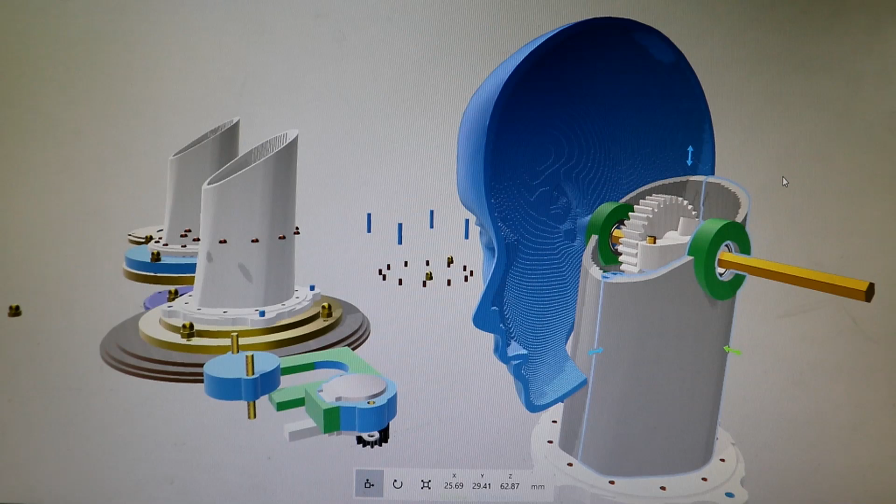Welcome back to the making of Victoria, the automaton.

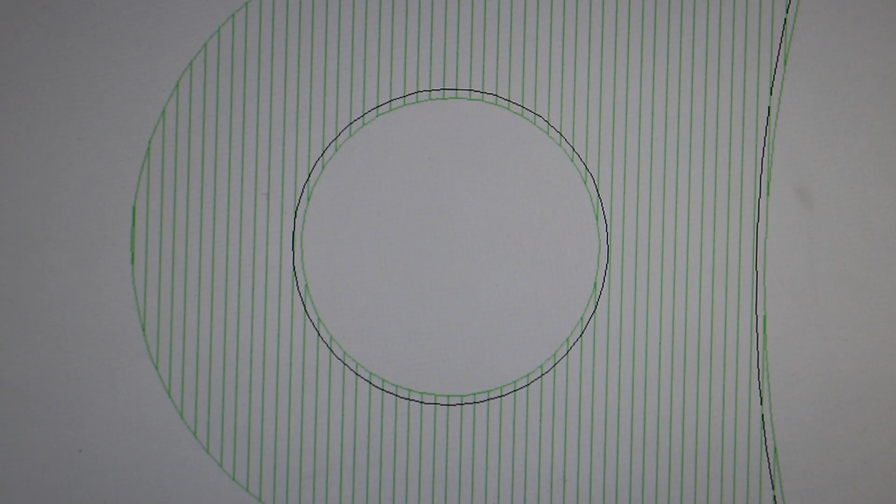I have now finished designing the neck on the computer using 3D Builder and 2D Design. Let's have a look at the other version, the 2D version of this. Here's the 2D version, as you can see, handily labelled.

You can see it's made of lots and lots of little green lines that are 0.15mm apart. Quite useful because in 2D Design you can hatch it on CAD software. So I just use the hatching fill, and the laser software doesn't see it as that, it just sees it as lots of lines. So it's going to engrave those down to about 1mm deep, and then the black lines it will cut out. Let's go and cut that out.

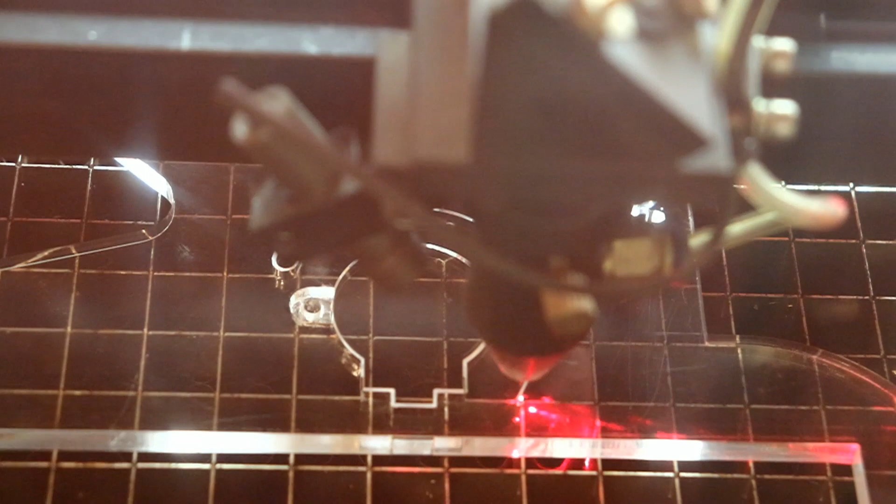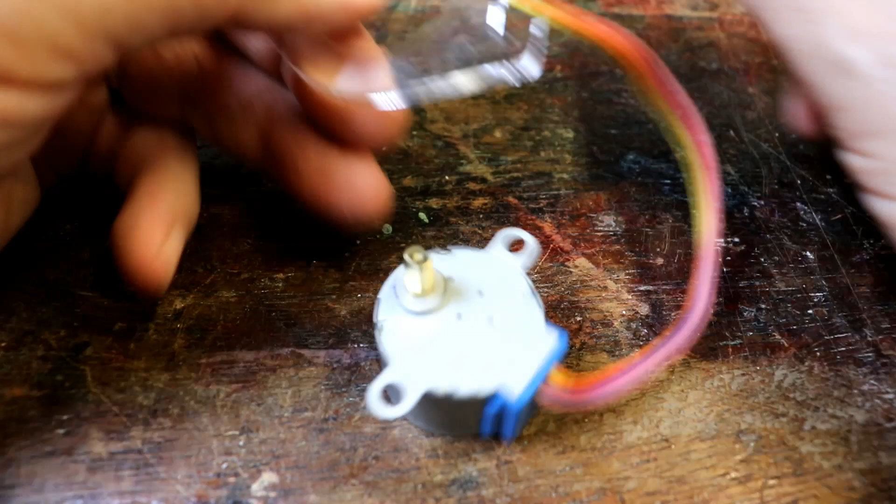So here's the finished item, and you can see there are the two rebates, they're about 1mm deep. Here's the lovely little motor, and what I'm hoping is poke the wires through there, and then this should - oh look at that, that's so satisfying. It just fits perfectly.

If you look at the shape of the drive shaft on the motor, you can see it's got a 5mm diameter with two flat sides and a 2mm base that's still round. So ideally, I don't want to have to start machining brass bits like I've done in the past to fix on linkages and things. I want to cut this shape out of the acrylic gear tight enough so it'll push on firmly, and then I can fix it on with just a couple of drops of super glue.

So here's the 3D representation of the gear I'm going to cut out. 11 teeth with this funny little bit in the centre. I imported this via a bitmap from 2D Design. Unfortunately I can't do it the other way around, from 3D Builder back into 2D Design, I can't do it.

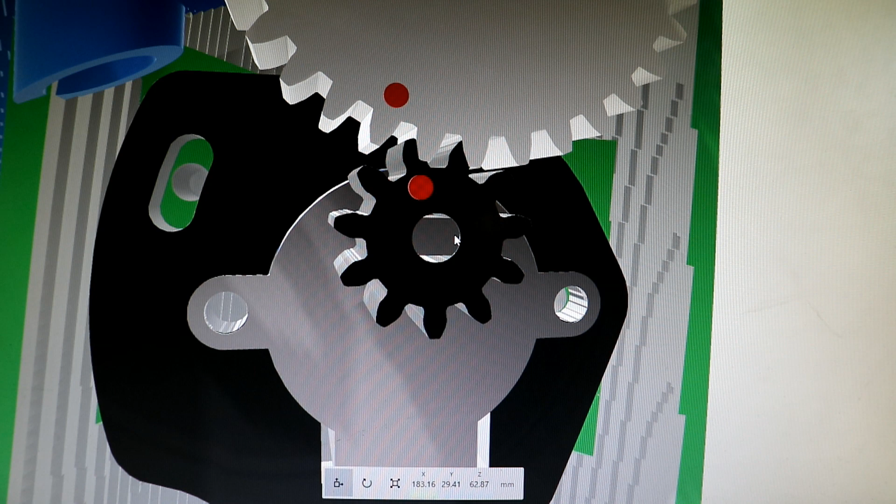Here's the gear in 2D Design, and you can see, if I zoom in, there's the same thing that we had just now with the hatching that's going to cut the circular rebate ready for the shaft to go in. So I'll export that and cut it out.

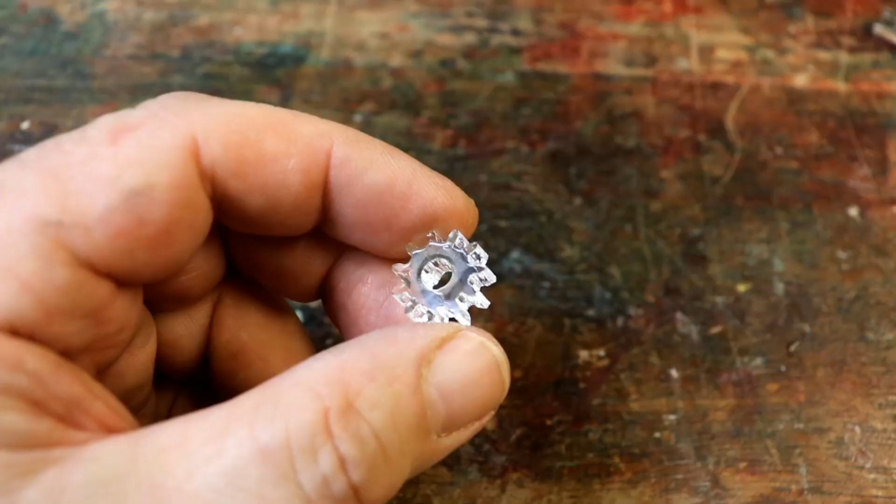So there you have it. There's the gear that's cut out, and hopefully it will just - yes, just pushes on. I can't get it too close with this lens, but you can see the circular bit's gone into it and the end bit is sticking out.

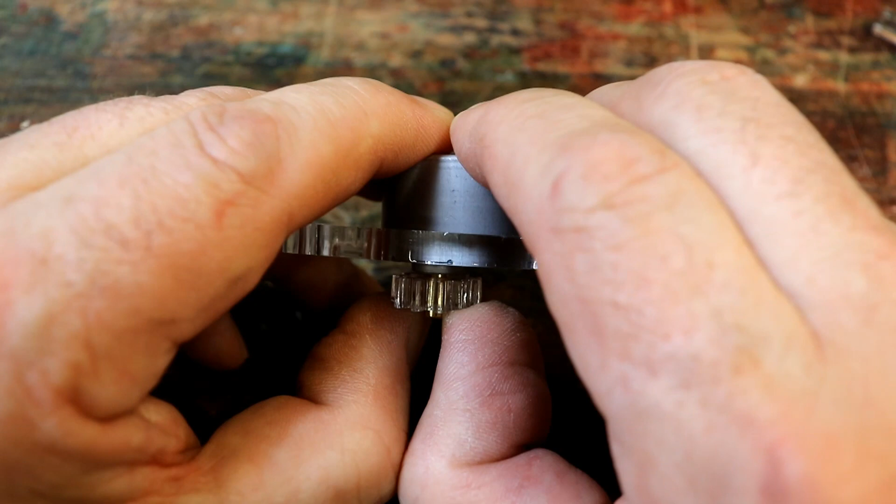Originally I was going to make the gears out of 10mm acrylic just because I want them to be really reliable and have more than double the bearing surface, basically less likely to wear out. Probably not a problem, but I thought I'd overdo it anyway.

But when I tried to cut out the gears from 10mm acrylic, it wasn't very successful because of the distortion. Some of them were worse than others. Because it gets so hot, some of the bottoms of the teeth are also bent over and things. I gave up in the end. I tried it several times, but in the end 5mm was so much better. There's no distortion at all. Well, that's a good sign, that's nice and firm. There's no distortion, the teeth are really clean.

And then I went ahead and thought, hang on a minute, why not just cut out two 5mm gears and stick them together? So that's what I'm going to do. This is just a little drive shaft I was using to experiment with, and then glue them together and they will be perfect, especially if I get them lined up properly.

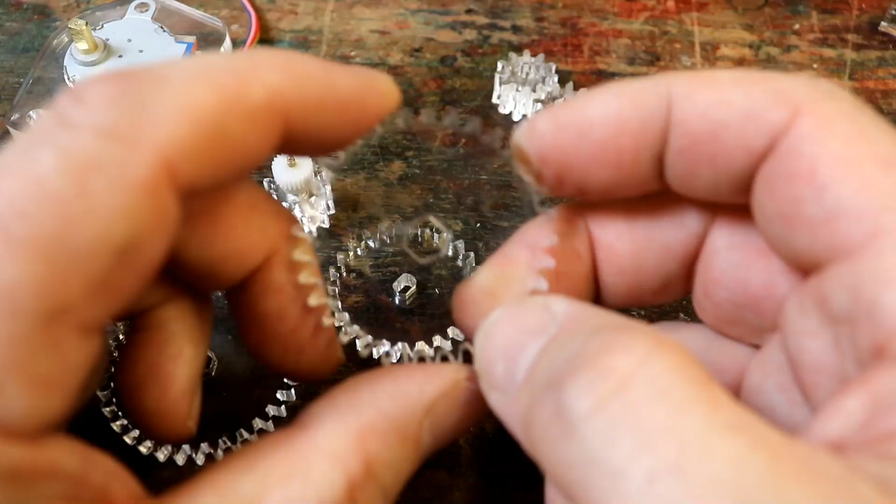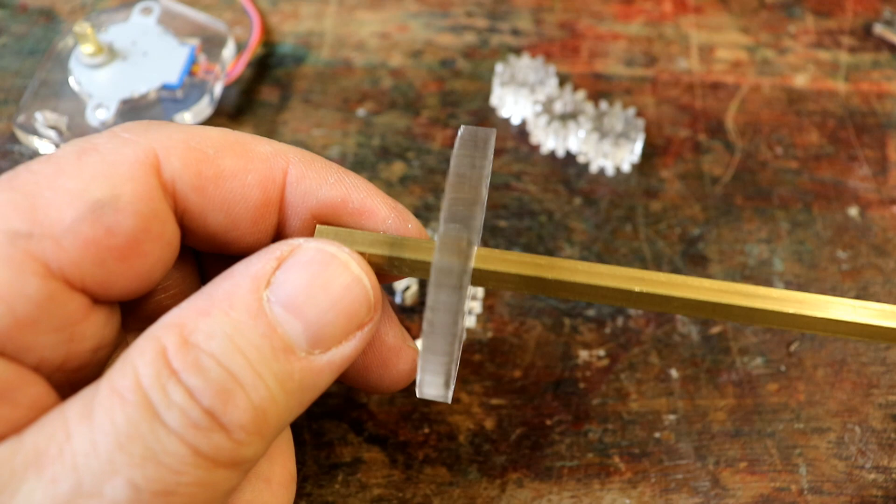That's going to drive the head up and down as well, and I've had the same problem spending ages cutting loads and loads of little hexagonal holes until I found one I was happy with for the quarter millimeter thick hex rod - quarter inch, 6.3mm, rolls off the tongue nicely. I'm going to do the same with that, so I'm happy with the size of this. Thing is, it's worth experimenting, because once you've established the right size you can then copy it over to future designs.

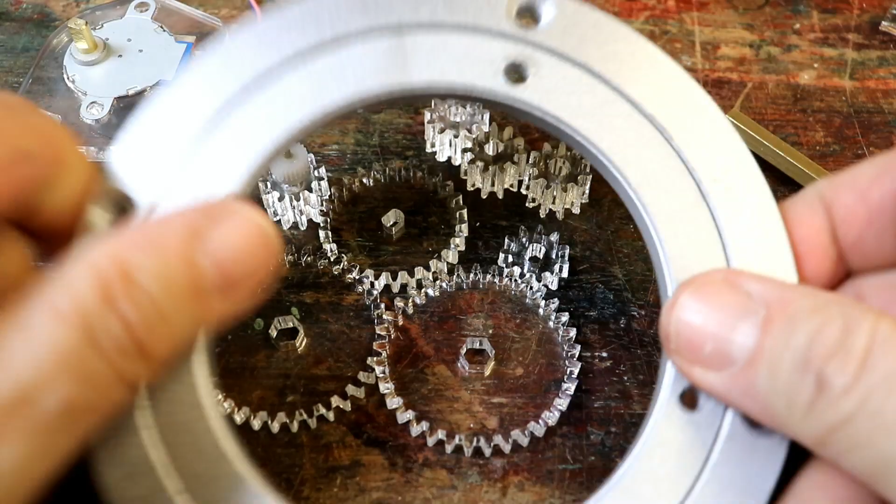Right, so we've got all these little bits and pieces done. I feel some 3D printing coming on, and it is so exciting. Oh, the other thing that arrived, which is brilliant, is the Lazy Susan bearing. And this is absolutely fantastic.

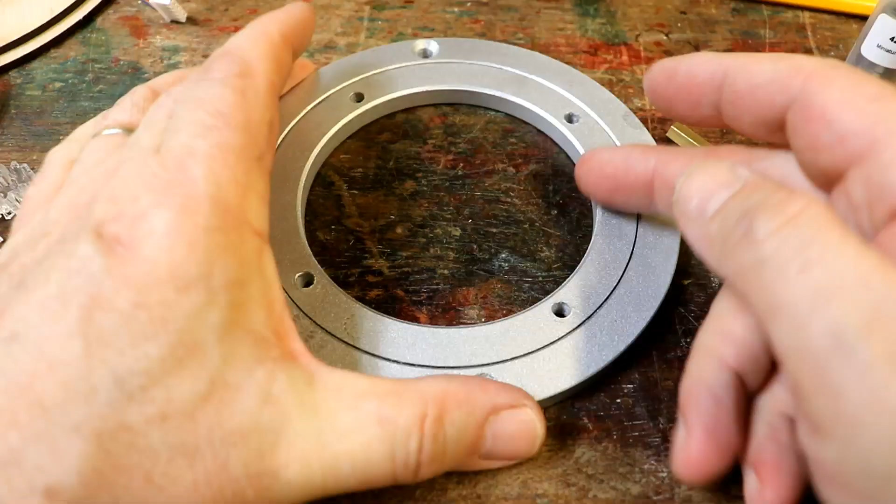I hoped it would be. Like I said in the last video, previously I'd used pressed steel ones. This isn't - this is machined out of two pieces of aluminium, and the balls, as you can just see here.

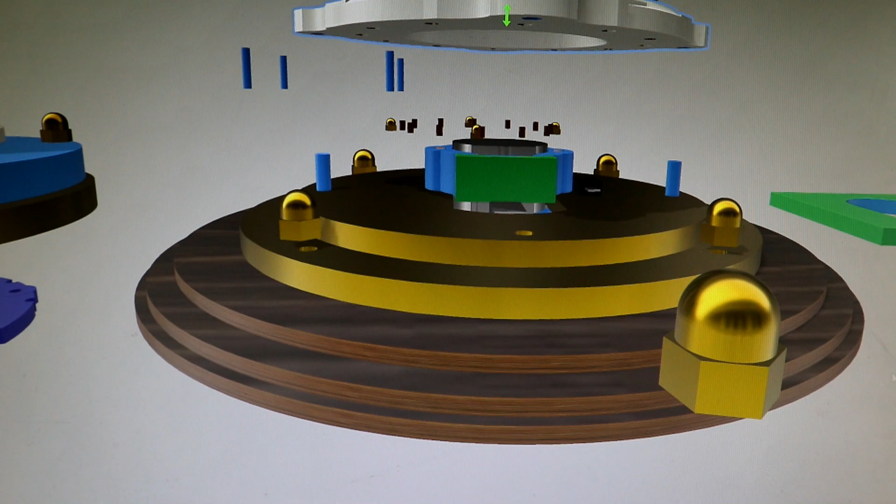You can just see the balls. It'd be a shame they're not more visible, but you can't have everything. They're trapped between the two, and it is superb. I can definitely recommend these. Beautiful. And because they're trapped within it, you can turn it either way around, and it'll take forces - downward forces, upward forces, lateral forces - no effect at all.

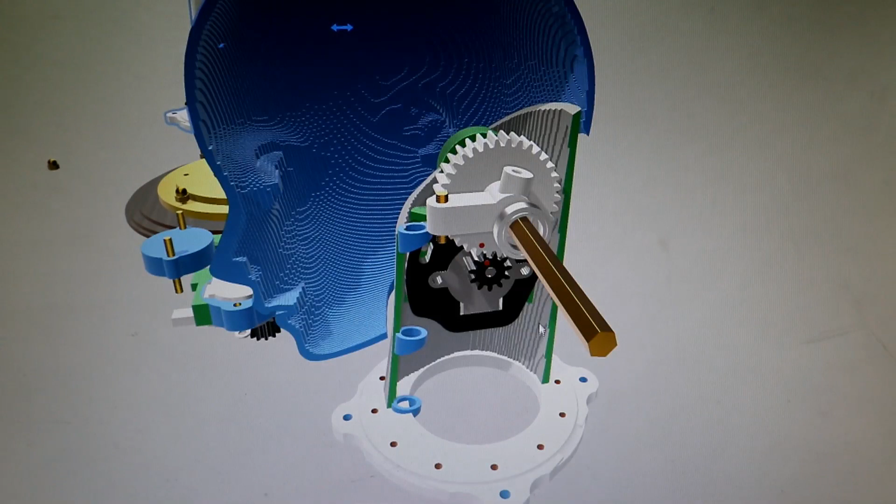It is beautiful. Oh, one little aside - I discovered that you can paint these in all different colours, but I've only ever used flat colours. I discovered you can colour things so that they are actually metallic. Absolutely incredible. So this dome nut, which was really quick and easy to draw, you paint it in metallic brass. It's fabulous. It just makes it look so good, and the wood as well.

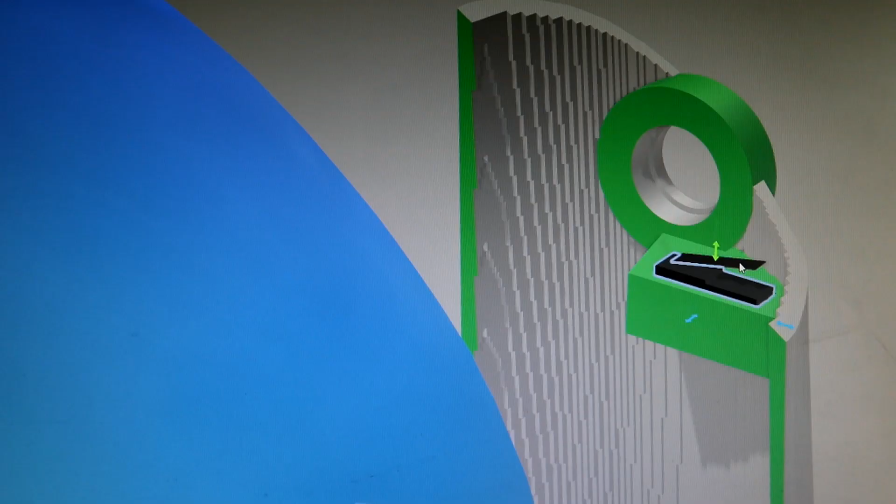Fantastic. Anyhow, back to this. What I realised was, obviously I need a limit switch like we were talking about before, so that as the head angles down, I need it to be able to tell the Arduino, the controller, the microcontroller, where zero is in effect. So what I did - spin around - a little microswitch in it.

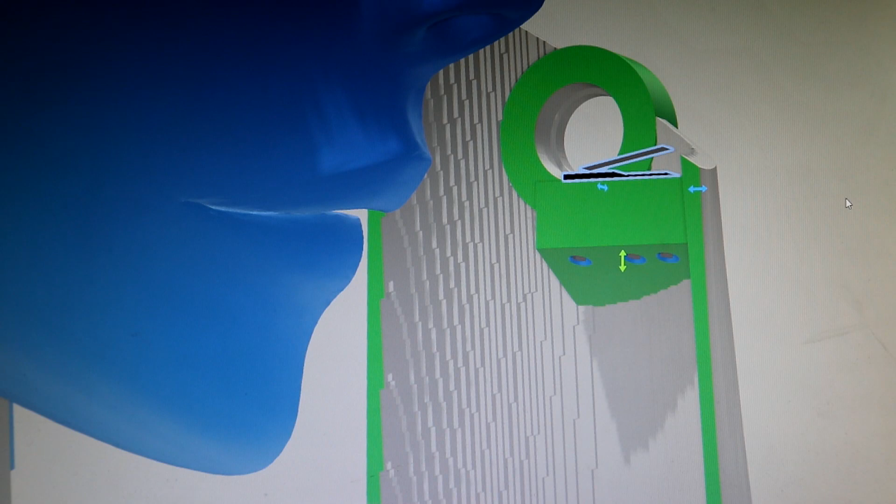I just modelled the microswitch and then hollowed it out, subtracted it from this little shape here, and again with experimentation checked that I'd got it the right size. And once I had, it was brilliant.

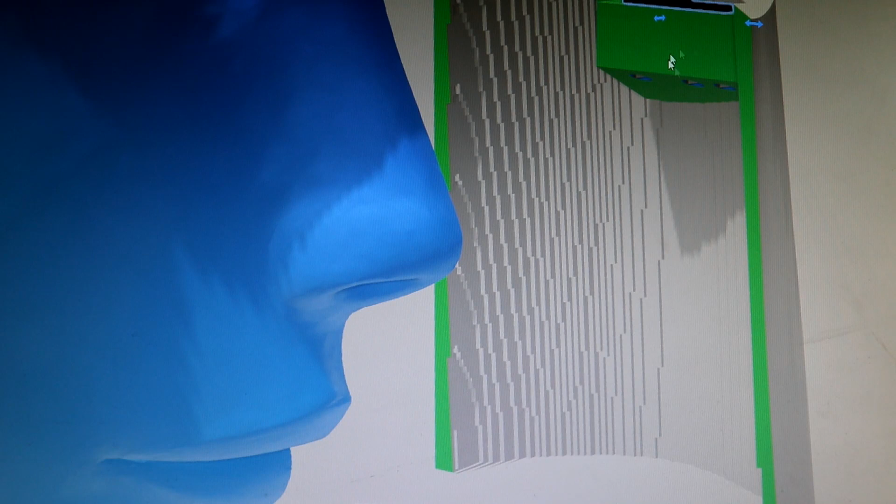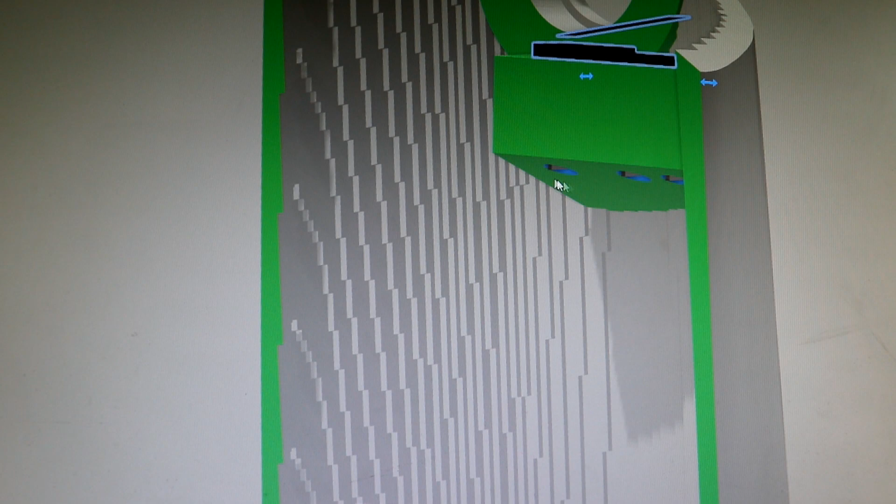There's also one other useful top tip - as you can see from this side of the neck, if I try and print this from the bottom, which I will do, it'll print all the way up happily, and then if I've got an overhang that's just horizontal, the first fibres aren't going to have anything to stick to, so they're going to end up with a pile of spaghetti and possibly some sort of semblance of this.

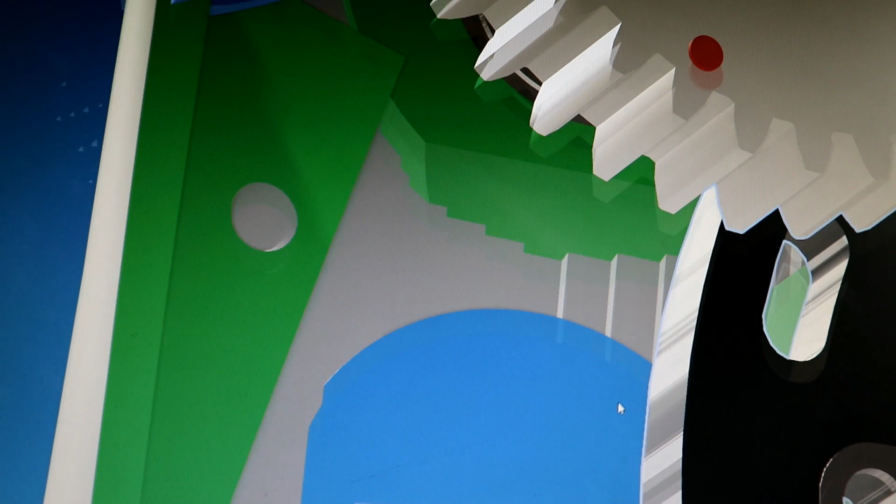But what I did was use the slicing tool at about a 20-degree angle. I found it very, very good. What it means is that as this slices up, it can start laying down a little bit at a time extra, and it prints it perfectly. There's a little angle there, and that's all it takes. Because this is angled out, it's absolutely fine.

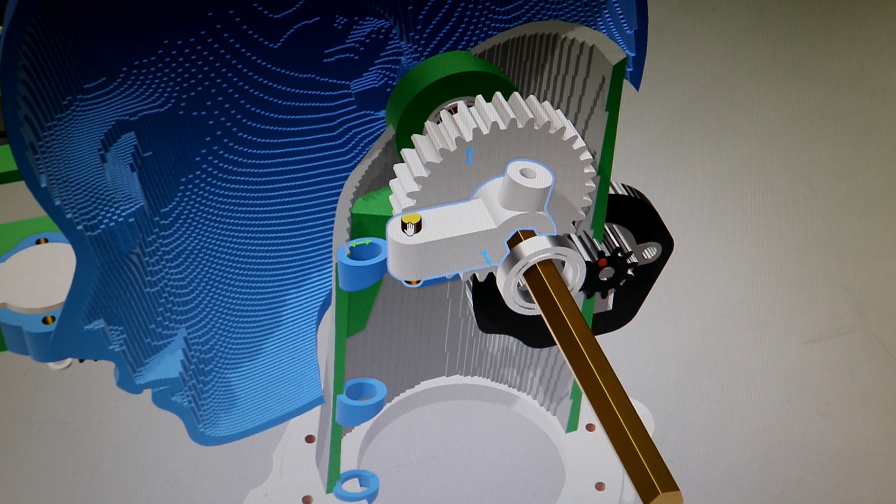Done the same thing in the bearing holder part. It was so easy. I was thinking about having to create a triangle and fixing it on and all sorts of other bits and pieces, but no - you just need to make sure you've got enough room and then use the slicing tool to slice a little bit off it, and there we have it again. That's enough, it will then print perfectly, and with these little cable hooks here, these little cable supports, angle - about 20 degrees will do it.

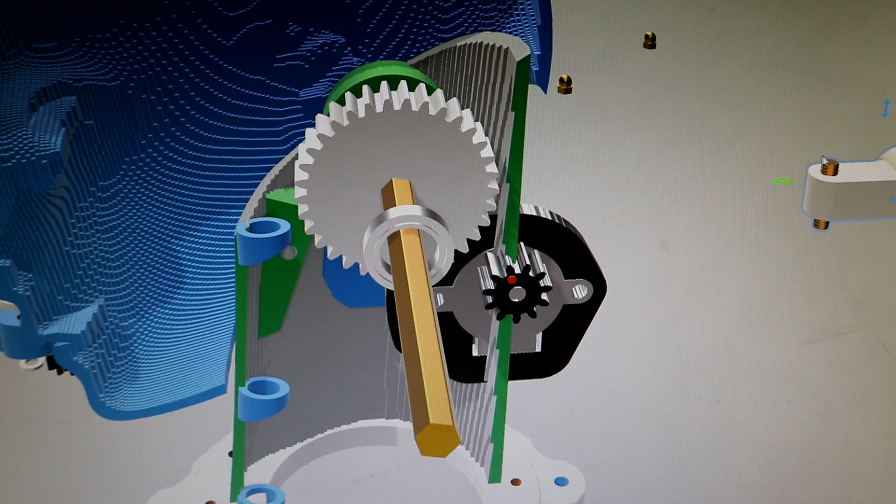So what I'm going to do now is print this bit. Oh, it's just a joy. It really is, it is just amazing. If I try and select this - because I'm getting all flustered here - no, right, let's have a look then. Let's move this back that way so we can have a look at it.

Right, this is a multi-purpose thing. It's going to support the gear, this large gear here, and it's going to activate the microswitch that you just saw on the other side.

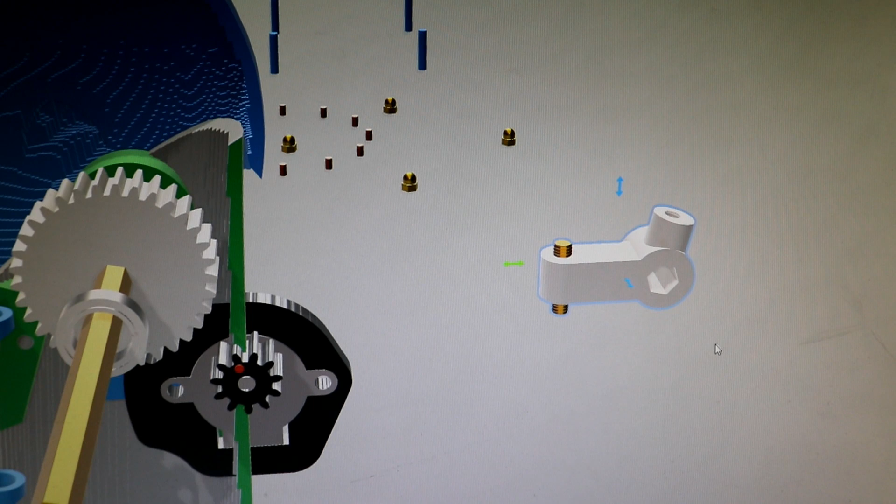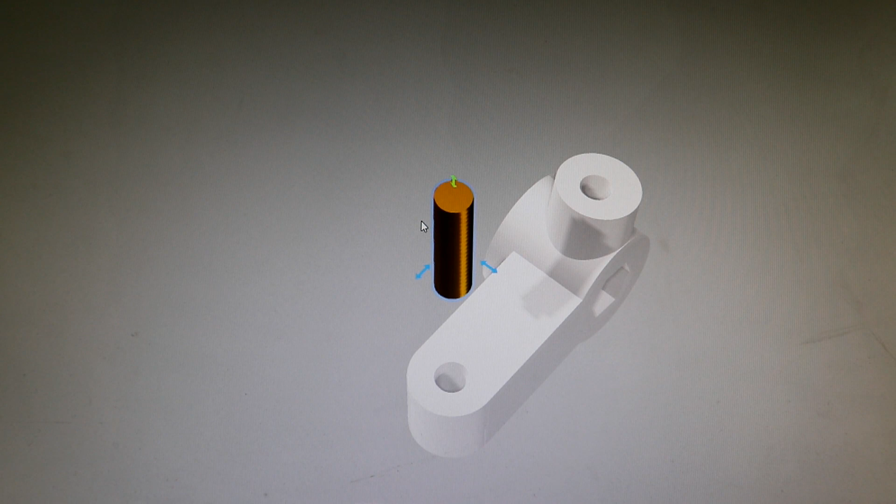And it's just so amazing because someone very kindly put up a free to download M4 screw thread. I've enlarged it by about 0.2 millimeters, and I found that if you subtract this from a piece of plastic, it leaves you with the perfect printed thread that works beautifully. I mean, how amazing is that? You can print this shape and you can even print the threads in it. I've just put this one back in - let's ungroup it and I'll show you what I mean.

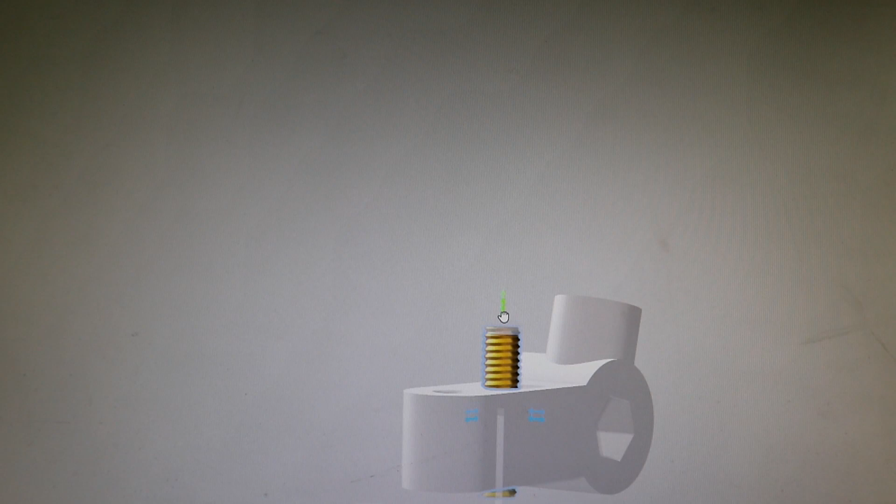There we are. So there's a thread I've just put in because it looks nice, especially when it's metallic and looks like brass. It is just fabulous, the realism is incredible.

But basically you drop that into a piece of plastic, so I'll step back again just to demonstrate. I can drop that down here, and like I say, this is 0.2 millimeters bigger, not longer. I just increased the X and Y, not the Z, because I wanted the pitch to stay the same, if that makes any sense. So there we are, look, I've dropped this thread through here.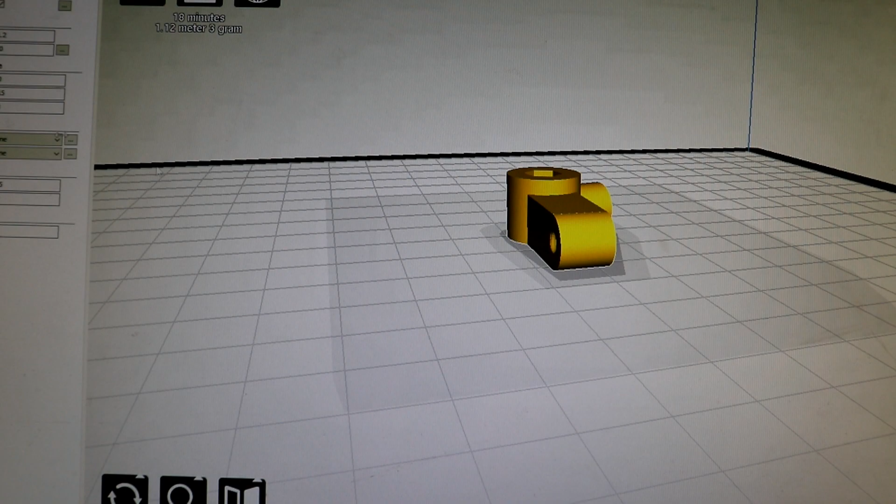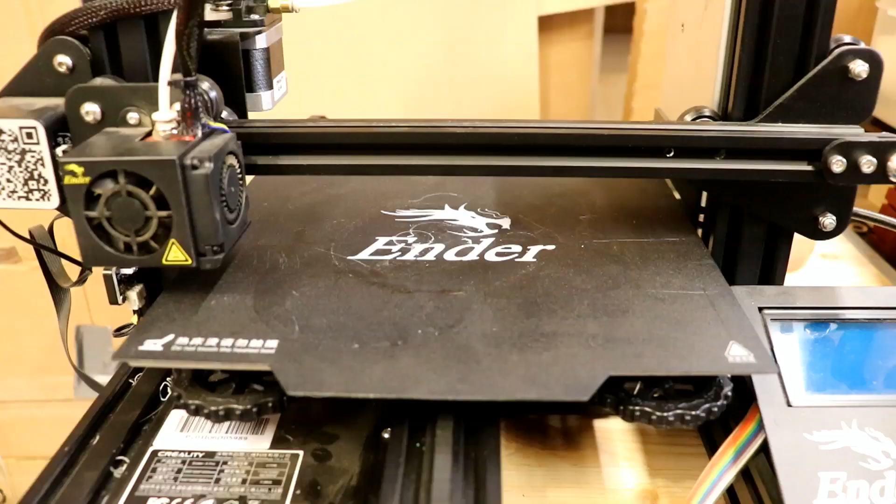All I need to do is go to Edit and Subtract. Look at that, and that will actually print the thread. That is amazing. Right, so there it is in the printing software, the slicing software.

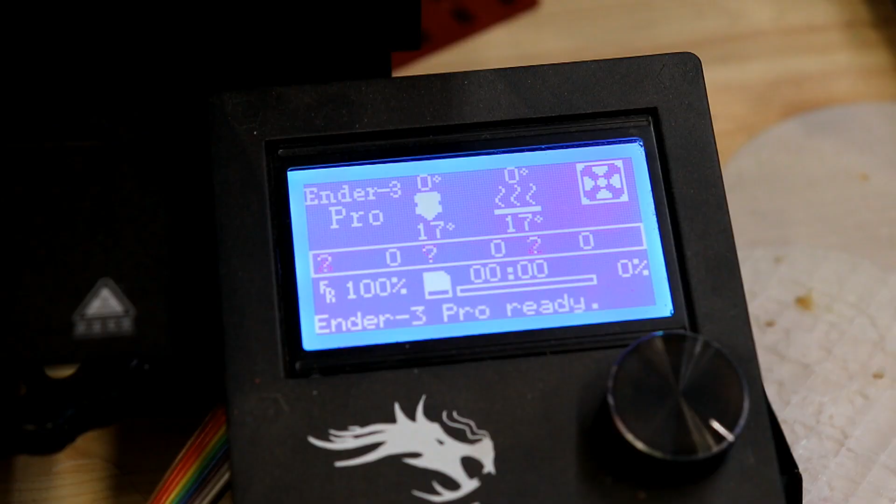It says it's going to take 18 minutes and use 1.12 meters of fibre, 3 grams of fibre. So that's fine. I'm just going to click on save as G-code. It's as simple as that.

I'm going to switch the laser cutter noise off and swap it with the 3D printer noise, which is a nice little whirring sound.

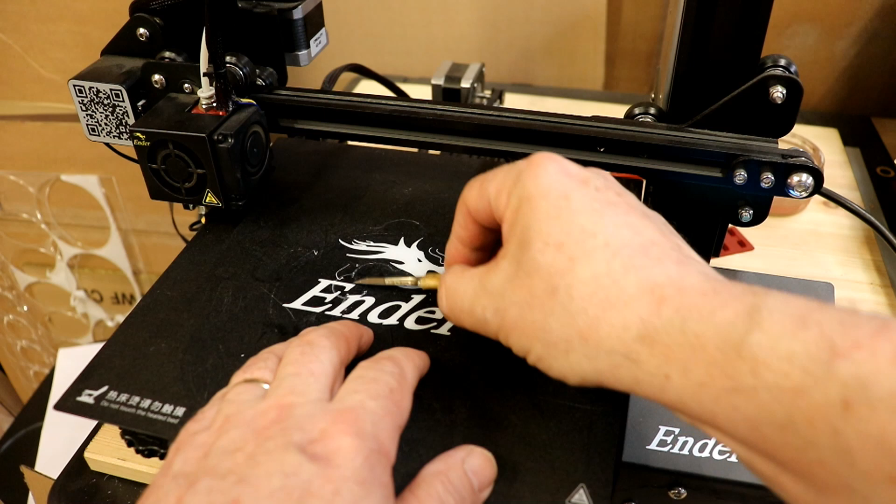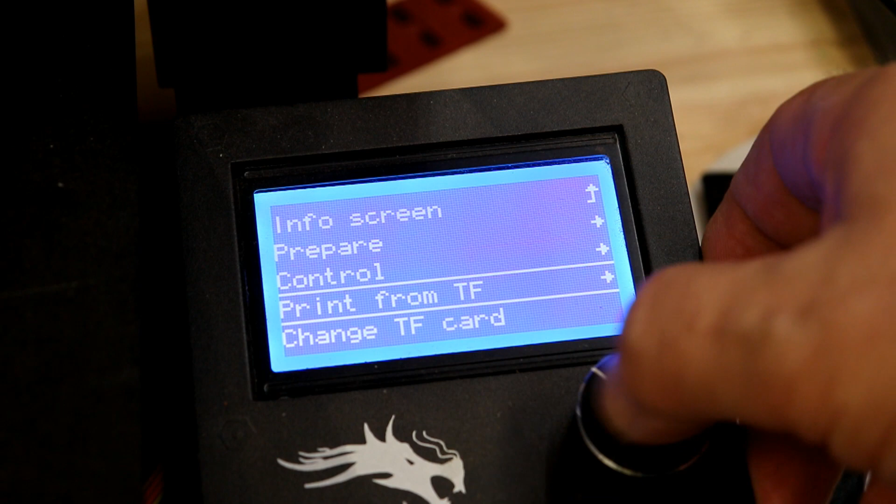Then I'm going to preheat PLA, which is the type of plastic. What that does is it warms up the bed of the machine to 60 degrees C for PLA, and that makes the printed plastic stick to it without losing grip and flying all over the place. And it heats up the little extruding nozzle in there to 215 degrees Celsius. I'm just going to scrape off the remainder of previous things I've printed.

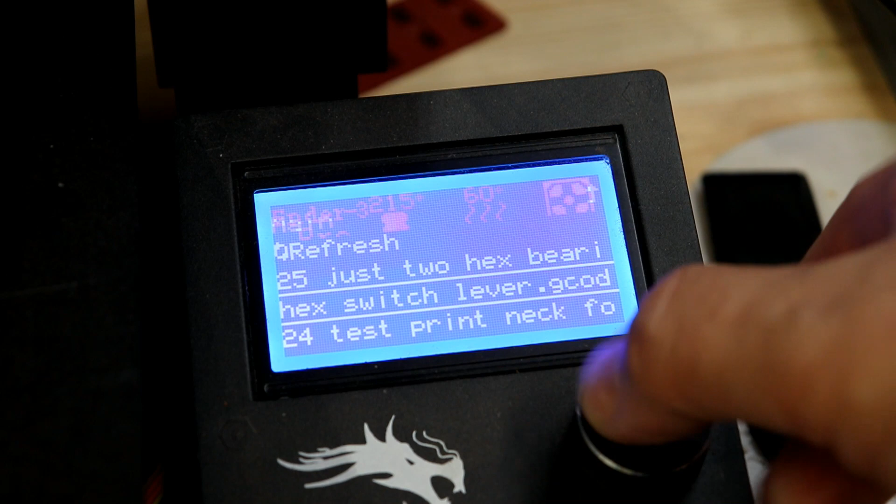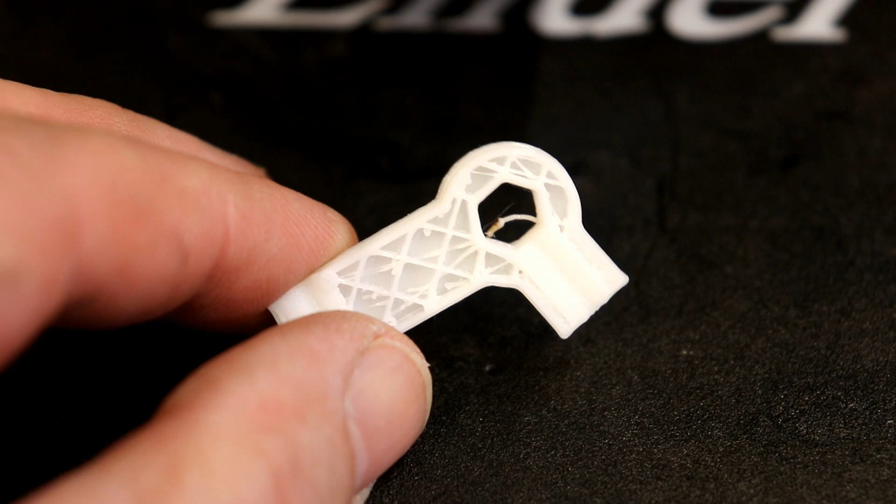I've stopped the print because I thought it would be interesting just to show. I'll get me a spatula. Just to show how these amazing 3D printers create objects.

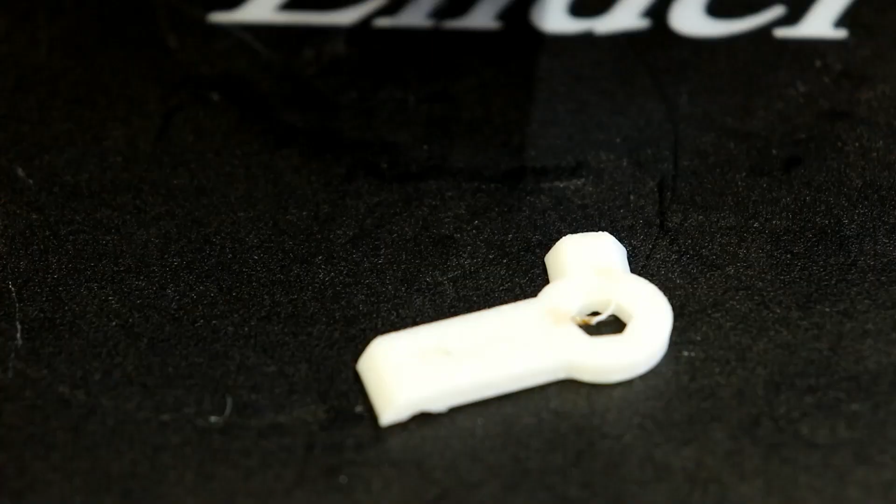So you can see it's got, 3.7 millimeters up it says, and you can see it prints a solid base on the bottom, and then fills all the gaps in with webbing. You can dictate, you can say I want 20% of the inside filled, or less, or more. You can have 100% if you want it absolutely solid.

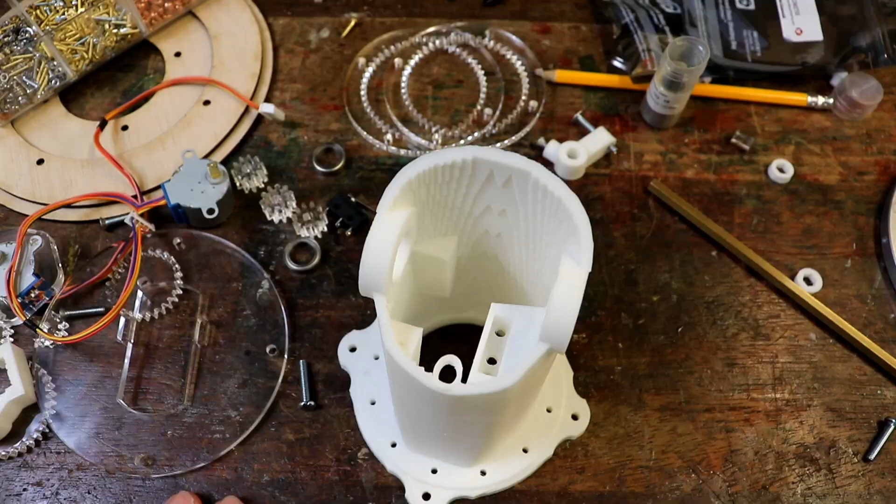Here's one I prepared earlier. There it is, this is what it's going to look like. And I've put screws in it just to make sure that the threads did print properly, and they did. Just right, not too loose, not too tight.

So from the original M4 design, the 3D design, just increase the X and the Y by 0.2 millimeters I've found, and then that is perfect. It's amazing, how absolutely fabulous.

Look at that. So there's the finished printed neck, which I think took 8 or 9 hours, something like that. I'm so pleased my fibre tensioner repair carried on going, so I didn't waste loads of plastic. There's little holes there for wires to be guided down through, so they don't get in the way of anything.

There's the Microswitch slot and bearing holders. Oh, it's just brilliant, I'm so pleased. It really is very, very tough.

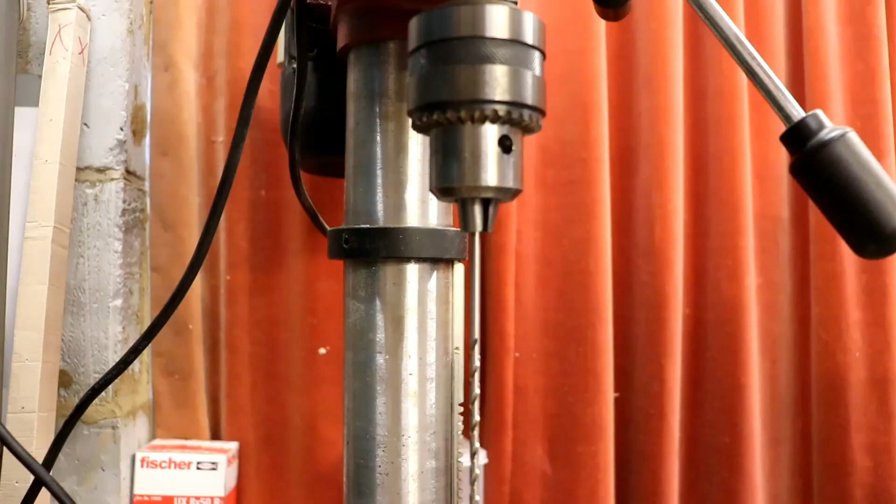I've got a little row of holes down around the bottom for these little copper rivets, because I had them on Florence and they look great, and that's perfect. They just fit in the hole, they push in perfectly without any fiddling around, and there's a little hole at the back so I can put a drop of super glue to hold them.

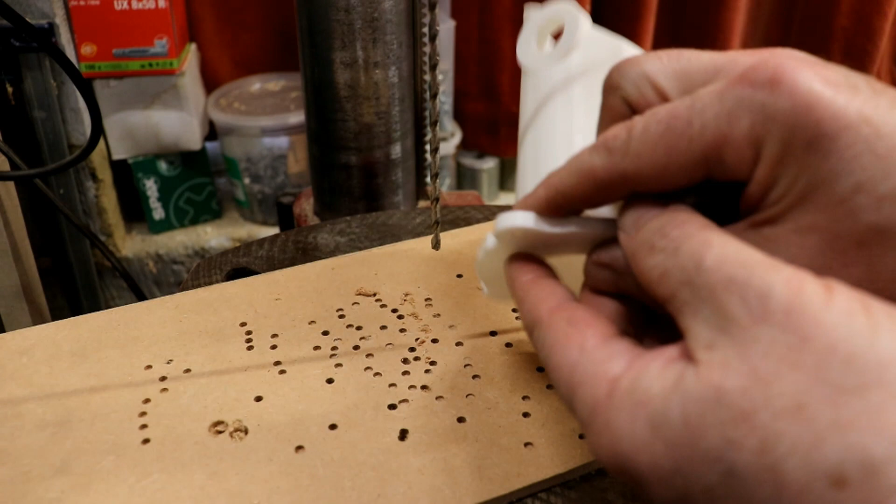However, I think that these holes, the M4 screw holes that are going to fix this onto the next bit, they're just too small, so I think I'm going to go and use my unfeasibly long 4mm drill bit. Look at the size of this.

Oh, missus. Very useful for some things, for example this job, because I can't stand it that well, and I could risk balancing on the edge, but then there's a little step here, so that's not going to work. So it really does need to be flat on a surface.

Wibbly wobbly, but never mind. Try and get my hand out of the shot whilst working the controls.

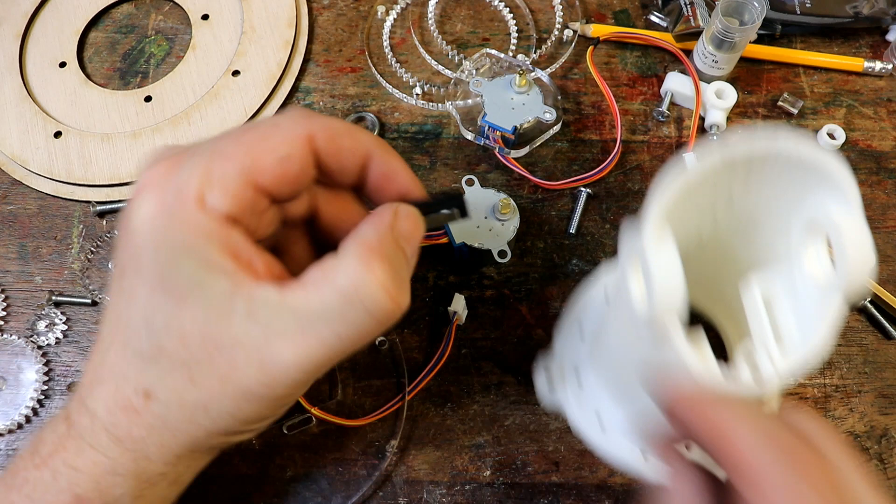During the meanwhile, I've been cutting out all the other bits and pieces. Yes, it's all so exciting. I've got my motors, got my Microswitch, which is going to do the sensing for one of the motors, got a base bit, I've cut out 2 bits of wood, got another thing I printed to hold the other motor down and all the gears, and that lazy Susan bearing. It is so exciting because it's now time to start putting this all together and see whether it works.

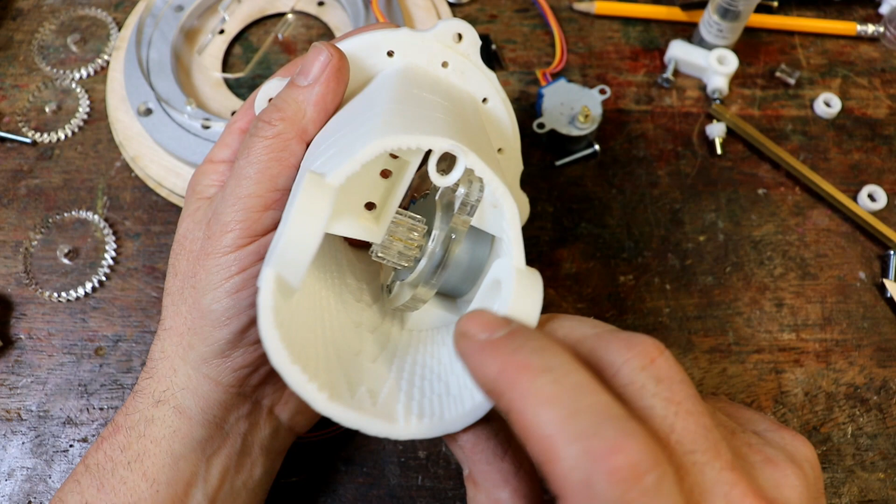What needs to be improved? I've got stuck before I even started. That's the motor, the first one. I've put the pieces in, I haven't glued them on yet, just in case. This fits perfectly up inside. If I can get it lined up like so, that's perfect. That will then be adjustable. But I haven't got any way of getting a screw, an M4 screw, into the side. I didn't want to have any holes on the outside - that would have made it a lot easier, but it would have spoiled the look.

After fiddling around for ages trying to get a variety of screws into those two holes, I gave up and drilled two little holes. Perhaps Victoria can have a couple of little beauty spots on her neck or something, I don't know, but it was so much easier. I just made them the right size to get a small screwdriver through, and once I had that forcing and twisting, the screws went in perfectly.

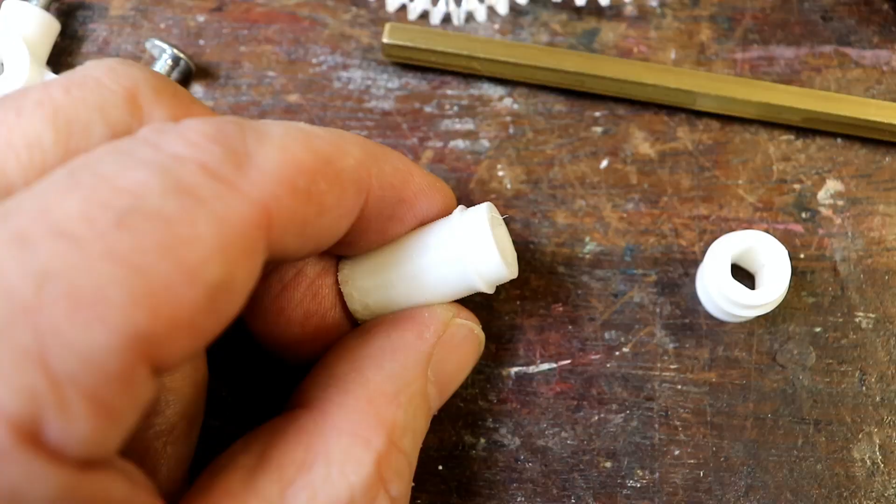So you can see there's the motor mounted inside, and it pivots up and down somehow. How can I show you that? Well, yeah, it does pivot up and down, so I can accurately adjust this gear to make sure it engages properly on the next gear up.

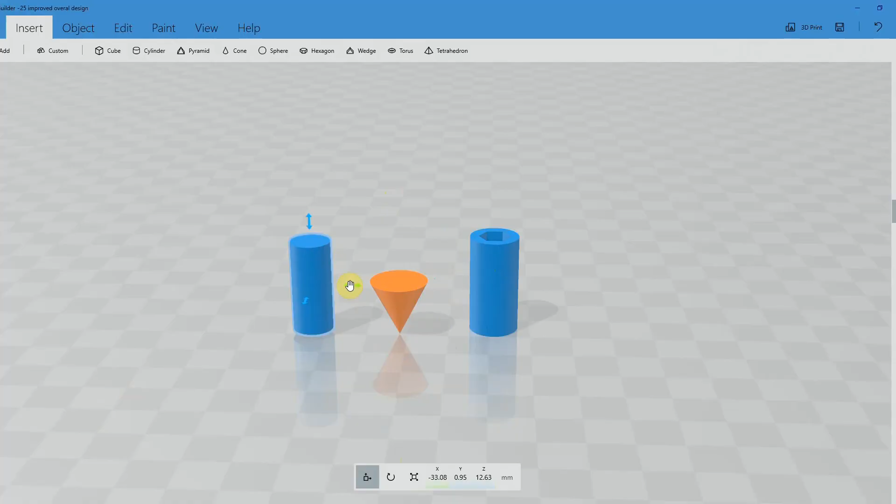Here's one of the bearings, the beautiful bearings that I'm going to use to support the head, and let's see whether they actually push in. Oh look at that, oh joy unbounded, it is amazing. Again, I did this with lots of experiments to get exactly the right size, just printing a little bit with a circle in it just to get the right fit. And that just sits in there.

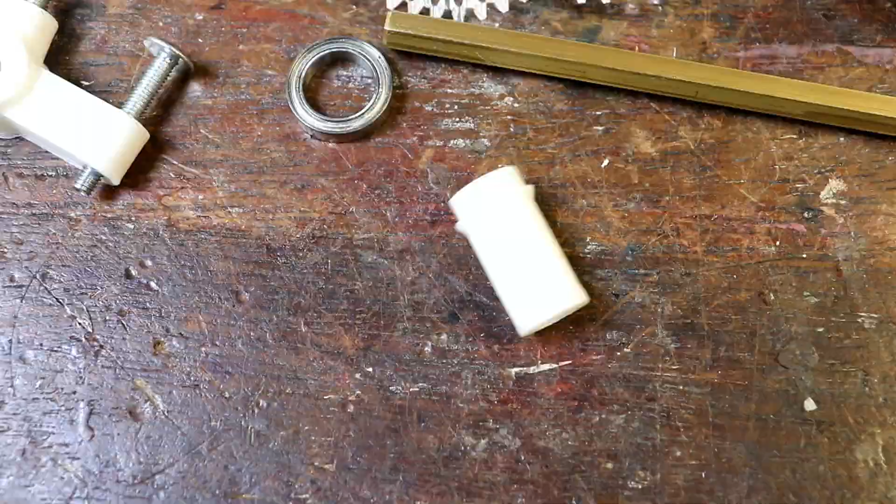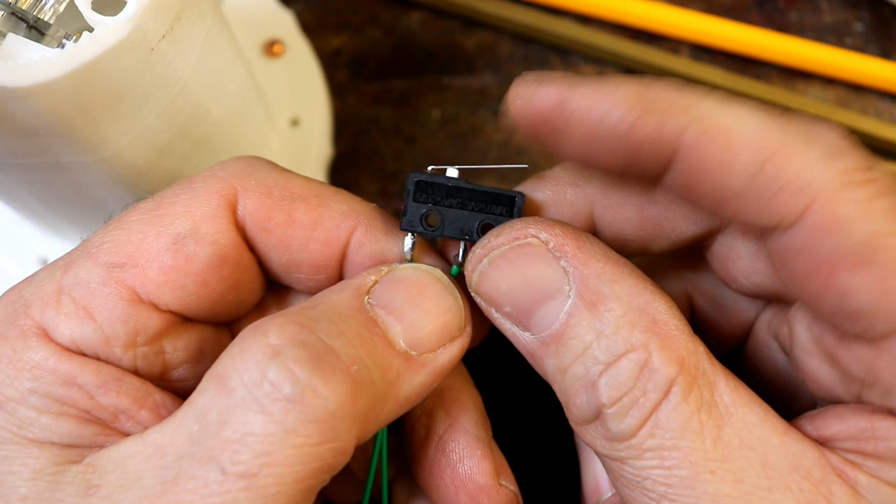Oh joy. And then what about, here's the little micro switch, let's just try that. Oh God, I tell you, it doesn't get much better than this. So I'll get the ones I printed out, although everything's getting a little bit mixed up here. Oh surprise, surprise, two of these which have got the hexagon in the middle for the brass hex rod, and the outside should just - yeah, so that fits inside.

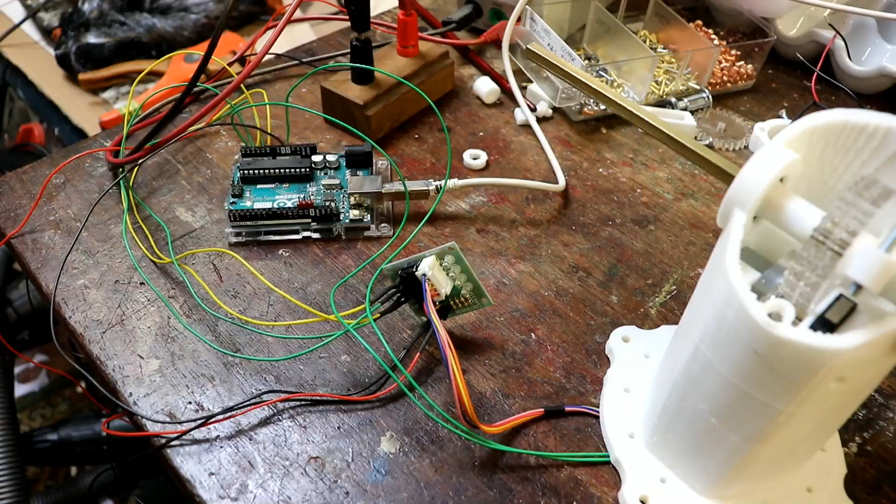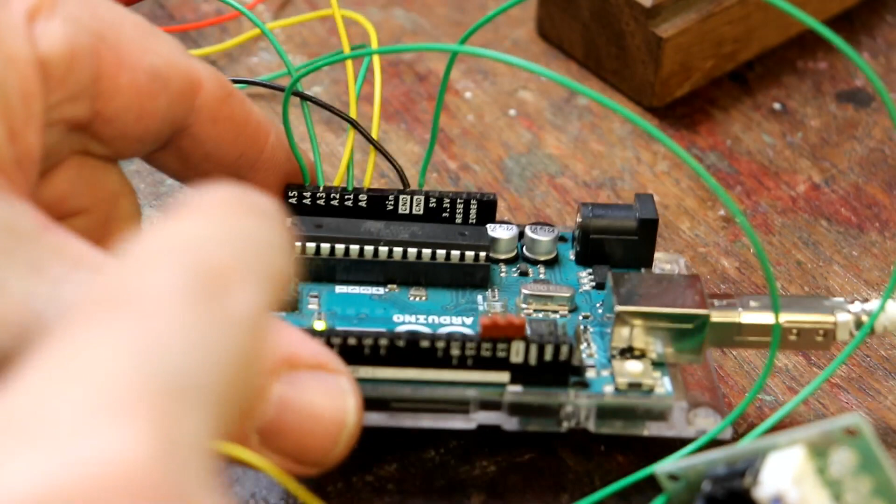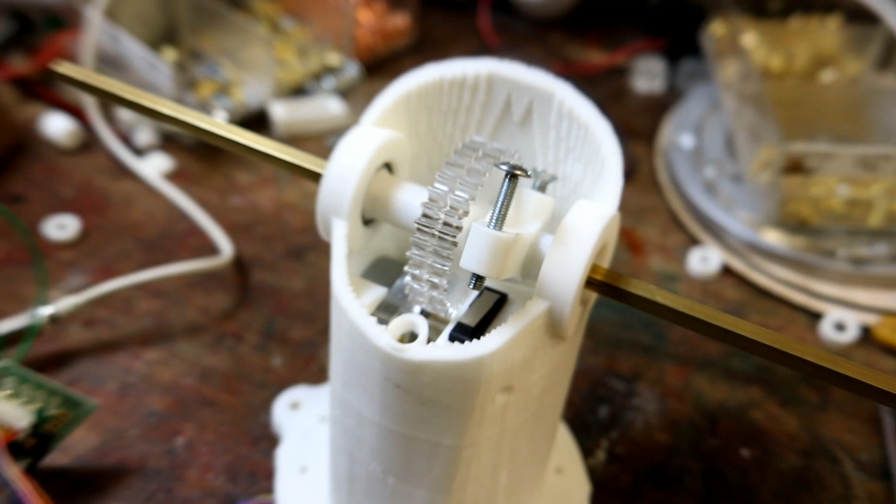I've designed and printed the two new spacers, the bearing supports, the hexagonal bearing supports and the spacers, and you can see where this actually fits into the bearing, like so. I've just added a little ridge there so it can't push any more that way. It'll also hold the bearing into the socket, and I did that by using the cone tool, the cone tool on 3D Builder, so it's an inverted upside down cone. I cut a hole in, hollowed out the middle, and then just got it to the right position. That's perfect because, like I was saying before, as this printed from the bottom up, it printed that perfectly. There was no overhang - if I'd tried to print it this way up, it would have started trying to print outwards and been piles of little plastic spaghetti everywhere. So see how well it all fits together.

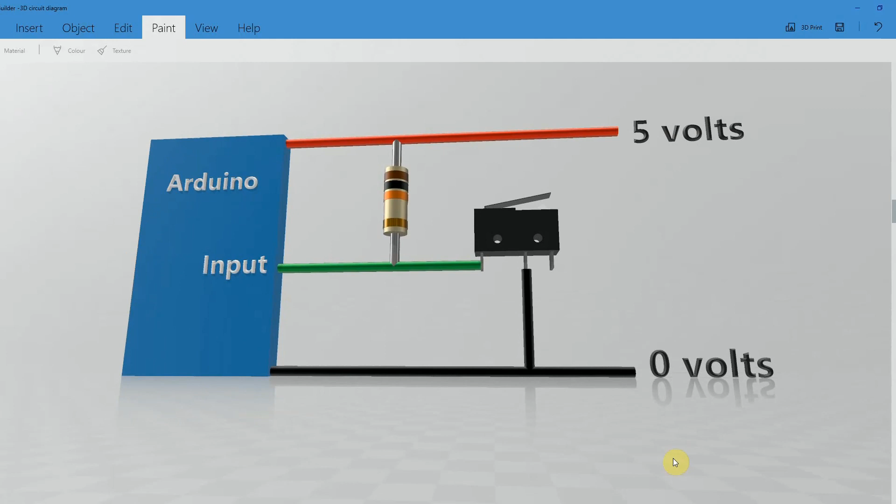Also, I just realised that once I put the shaft through here, I won't be able to get the microswitch out, so I've soldered a couple of wires onto it, so that when that pushes down, that can let the Arduino know that the head has reached its limit, so I can put that in and then assemble everything. So it's all assembled. I've got my calculations a little bit wrong by about 1 millimetre, so there's a little bit of movement from side to side, but that's not bad. I could also just slide that along.

Right, I've got the Arduino wired up. There's the Arduino, here's the microswitch wires, and I have connected them - don't know whether it's going to focus or anything - but they go between ground, which is 0 volts, and I've decided that A4 is going to be an input, digital input. I mean, that's what amazes me about this, and I know it's all old hat these days, but all the inputs and outputs can be either.

I think they're called GPIO, general purpose input output, and you can just decide with the software what each one does. So A0, 1, 2, 3 are the outputs to drive the little interface for the stepper motor, and A4 is the input from the limit switch for the stepper motor.

Absolutely amazing. Now, because I don't want to risk getting these wired up wrong, like the direction or the switch being in the wrong position, so this grinds itself around and shreds the motor or damages anything, I just want to check the first thing. The first thing is the limit switch.

So what I've got here in the setup part, forget about the stepper motor, the head stepper, I just said pin mode A4 input pull up. That means it's going to have inside the Arduino a resistor connected to try and always pull it up to positive, so it doesn't float somewhere.

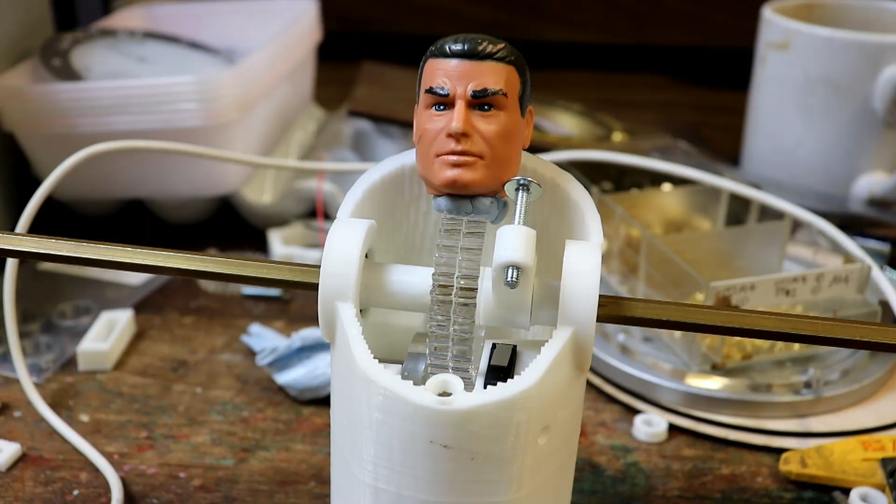There we are, not touching the switch, and it is 1, so the resistor inside is pulling it up to 1, which is positive. If I push the switch, it goes to negative. Let go, positive, or 1. Press the switch, pulls it down to ground, so that goes to 0, digital 0, digital 1, on and off basically. So that is fantastic.

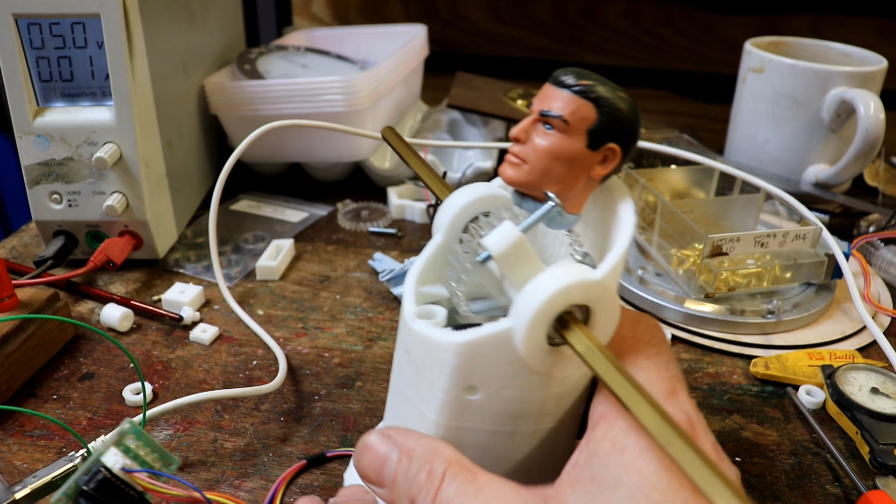I now know that I need to get the stepper motor turning until the switch goes to 0 volts, until the switch reads 0. So what Setup Motors does, it tells it to switch on the outputs to the stepper motor, then set maximum speed 1000. This is the speed I want it to go when it's working at full speed.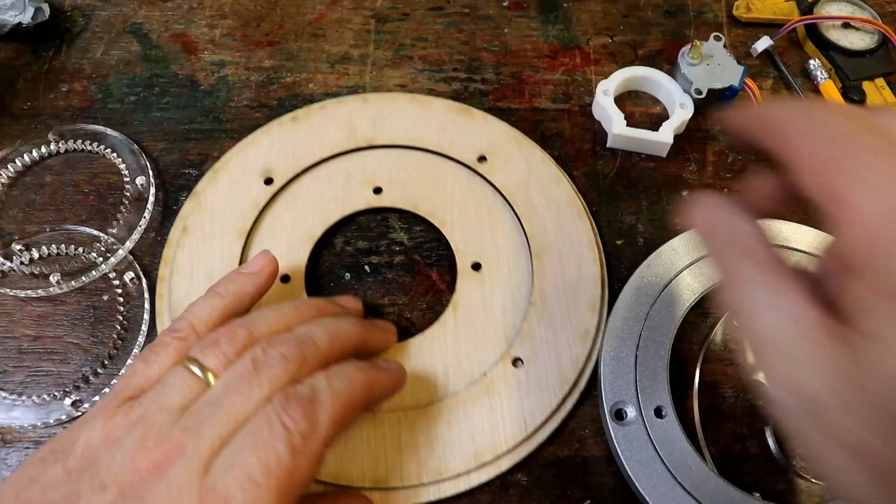Acceleration is 100, I've found that works really nicely for these little motors. Set stepper, I've said the current position is 0 because I don't know where it is when you first switch on, it could be anywhere. Then I've said move to minus 5000. That, from my previous test, means it's going to be tilting forwards, towards the micro switch.

So it's going to keep running it while the digital read is high. That means it's not touching the micro switch. As soon as the lever touches the micro switch, that goes low, and it's going to stop doing that and jump to the next one, which is set current position to 0. So we now know that looking right down, as far down as you can look, it'll be 0.

Then it's going to move all the way looking up, just out of an experiment. I just wanted to see what that is, and I found it's roughly about 1800. Do that until the distance to go is 0, and then stop and switch the outputs off.

So let's try that. So we don't know where it is. The Arduino hasn't got a clue where it is at the moment. So uploading it, and then it'll start working.

And there we are, right. Well, you can just see the little lights flickering. Right, it's come forward, you can hear it click, so it now knows to stop. Now it's going to go as far back as it can, and then stop. Now that's great, that's really good.

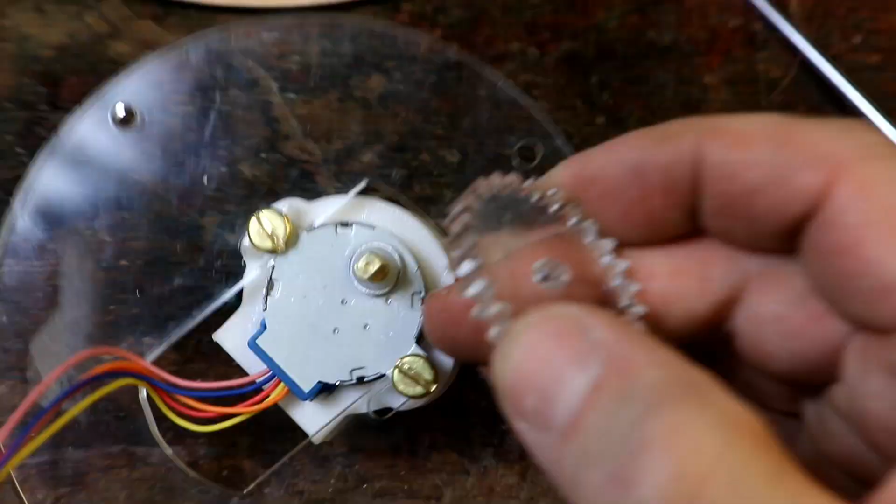Let's have an action replay, but from the side this time. So it doesn't know where it is, goes forward, clicks the switch, and then goes all the way back. That means by keeping account of how many steps back and forward I move it, or it has moved, I know exactly where it is every single time I want to move it.

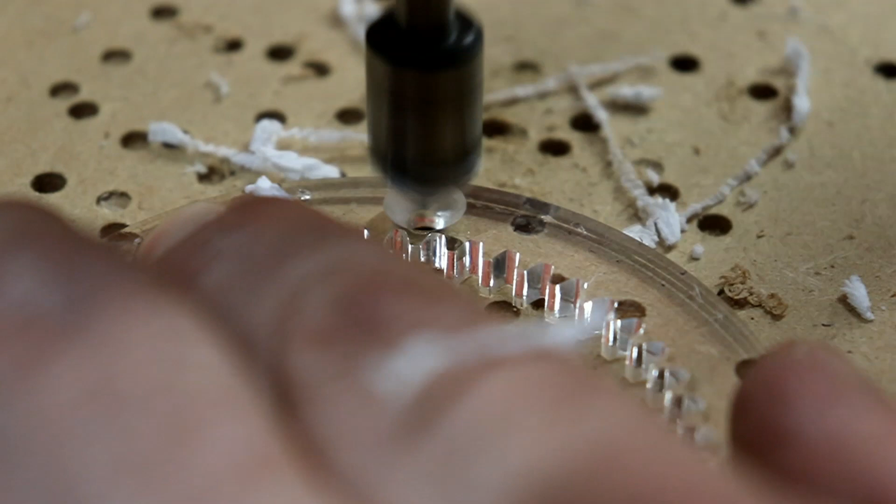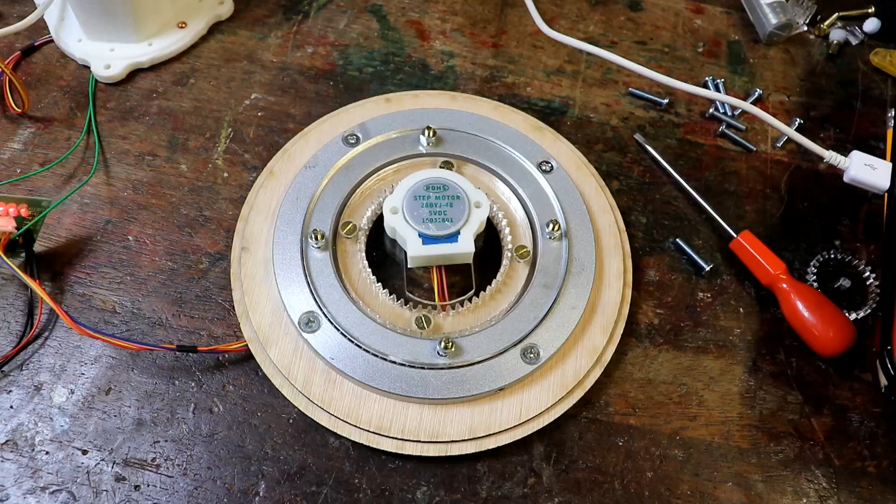So I've cut out on the laser cutter 2 bits of 3mm ply, and what I'm going to do is fix the outer one to these pieces of ply, so that is fixed, and the neck is going to go on here, like that, so that's going to turn.

In order to get that turning, my cunning plan is to use these two - just like I was saying, it was going to be 10mm thick, but no, it's 2 lots of 5s. Fix that in, so this gear is now fixed to the outside, and this is still free to turn.

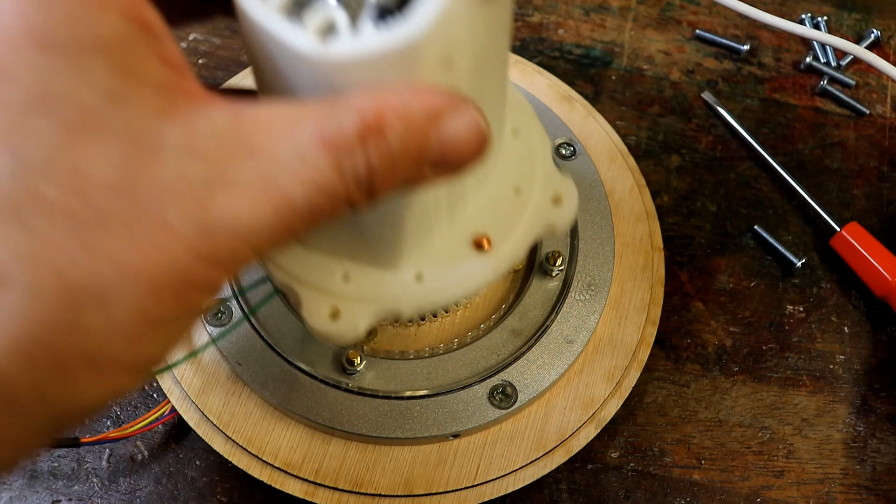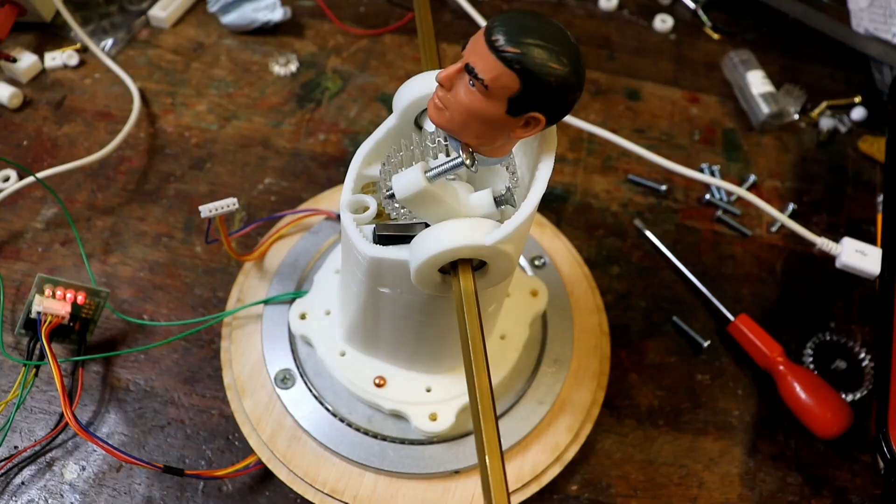Then this bit, which is going to support the neck, is going to have another 3D printed thing that's going to hold the motor down like this. Again, I can slide it so I can adjust the gears to bear on the inside of the teeth so it meshes properly.

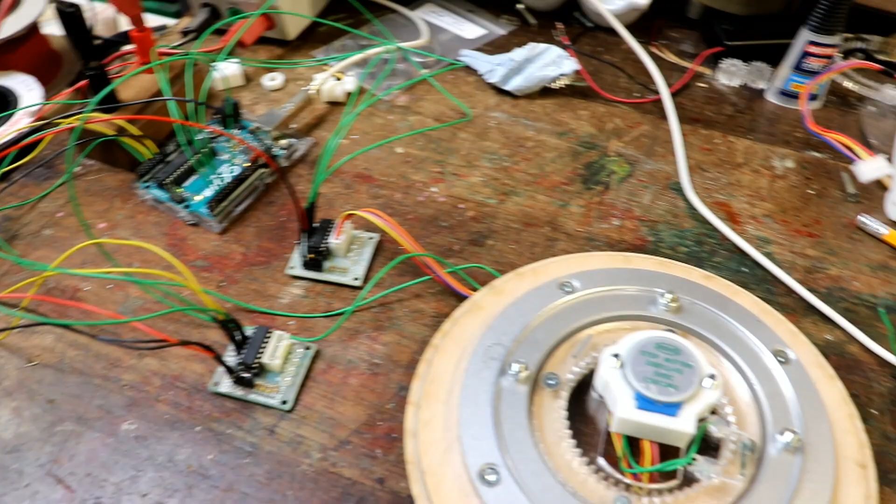So here we are. I've just plugged this stepper motor in rather than the other one, and I've got it on the example bounce sketch that came with this stepper library, and it is working a treat. Look at that.

Fantastic. So the outer part can be fixed to some sort of wooden cabinet that supports the whole thing, and the head will screw on to those and be able to turn. And I can get that - should be able to just, if all my calculations are correct, it should fit. Oh yeah, it does. Brilliant.

And obviously there's no switch on this left to right yet, so it could actually just go round and round, knotting all the wires up inside. So my next job is to work out how to let the Arduino know where this is, because of the limited space in here and so many bits moving relative to one another. And it's got to fit inside that hole here.

So whatever I do - just thinking - if I had one of the little reed switch magnets cut into some point on this gear underneath, I could then have a little reed switch on the top here, but I think there might not be room for it. I'll have a think and get back to you on that.

I've got the improvements made and I've wired it up for demonstration purposes to the Arduino with a second interface, so I can run both motors at the same time. This plastic bit is made of two pieces, and I've managed to rebate the motor a bit to leave room for another gear, because I realised when it was all put together there wasn't room here for a second gear.